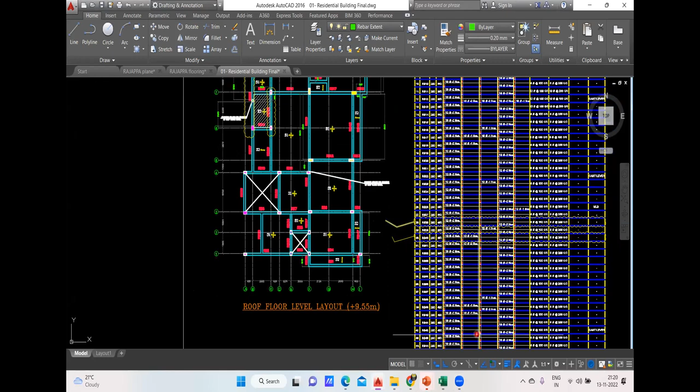In this lecture, I'll teach you how the shuttering quantity has to be found out. In the previous lecture, I started with the beam concreting, then did the slab and all, but I had missed the beam shuttering, so I'll explain that now. It's simple because I've already explained the plinth beam part and the first floor level, so you shouldn't find much difficulty. But anyhow, I'll explain how it has to be done. Let me go to the Excel sheets now.

This is not required, go with the other one. Yeah, fine, done. I think we should start from here, the RB1 part. You know how it has to be done? No? So where is my RB1? Right now I'm doing the roof floor level layout. Fine, so it's written here, RB1. So you know how to find it, isn't it? What you are going to do is find this dimension.

It will be DIM, dimension, enter. You take this outer to outer measurement. How much is this outer to outer? It is 5855, so I've written 5.855. The breadth is 0.2 and the depth is 0.35. Where should I find RB1? It's already here, okay, it's here. RB1, all the quantities are 200 by 350, 200 by 350, and I've done it.

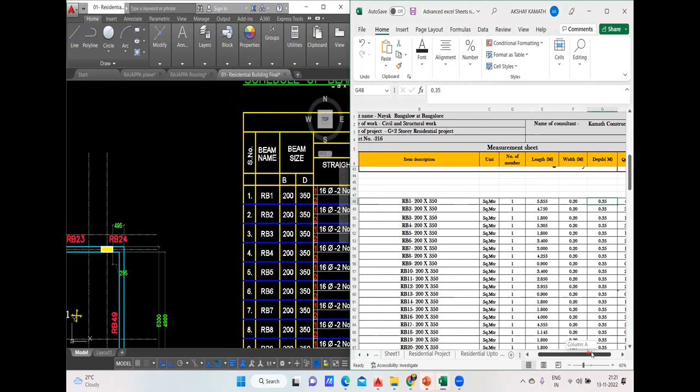Now can you find the shuttering quantity for me? It's very simple, always remember you have to find the bottom first. Once the bottom is done, you find the outside shuttering, and this becomes my inside shuttering. So I should know this particular length, which is 5455. I already took out the quantities here. I've done 5.855 multiplied by 0.2, this is the first one. Plus, open the bracket, this into this, plus 5.855 multiplied by 0.35, which will give me the outside shuttering because I don't have a slab in this part.

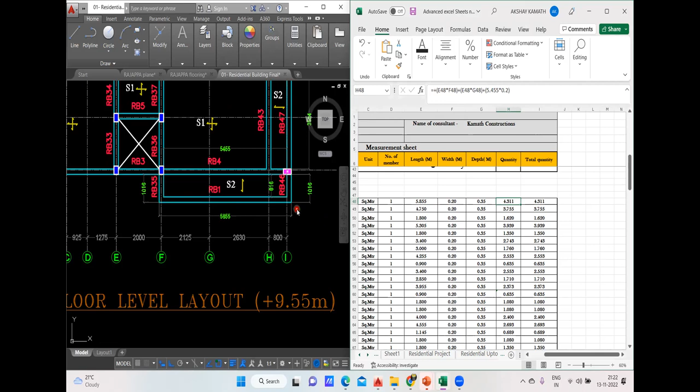Now if I come to this part, the length already taken is 5.455, and I have a slab here, so this becomes my inside shuttering. So what I've done is plus 5.455 multiplied by 0.2. Why is it 0.2? Because the overall depth is 350 and the slab thickness is 150. So 350 minus 200 comes out to be... yeah, 350 mm minus 150 mm comes out to be 200 mm, so 200 mm comes out to be 0.2. So this is how you're supposed to do it. Got it? So one I have done.

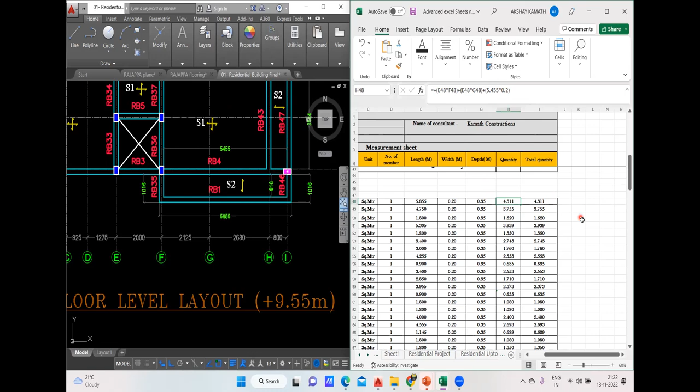So in the same way, you're supposed to do it for all the beams. I hope by this time you have knowledge of how it has to be done. Once you reach here, rest all things are very simple.

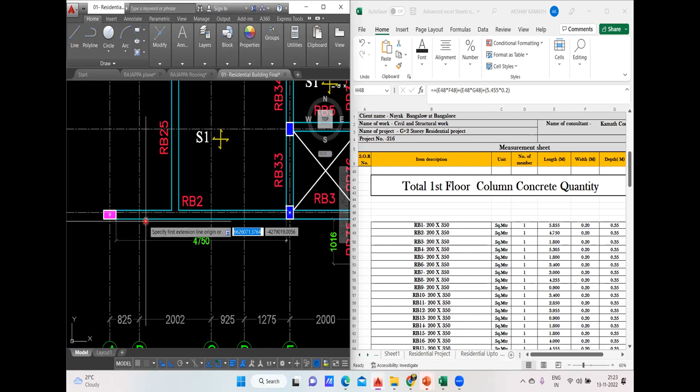For RB2, can you tell me what the answer will be? If this is RB2, it is 4750. I have written 4750, so first you find the bottom, that is 4750 multiplied by the breadth, you'll get the bottom beam shuttering. After that, 4750 multiplied by overall depth, because this becomes my outside shuttering. Then when you come to the inside part, you have a slab only in this direction. Only from this to this part you have a slab, which is 3000 mm or 3 meters, whereas here you don't have a slab, it's an open portion, so you take this length separately.

So what you can do is take 1550 into outside shuttering, this becomes my overall depth. So for RB2, again you multiply this by 0.35, and when you come to the inner part, you take 3000 into overall depth, that is 350 minus the slab thickness. If you do this, you'll get the total shuttering quantity.

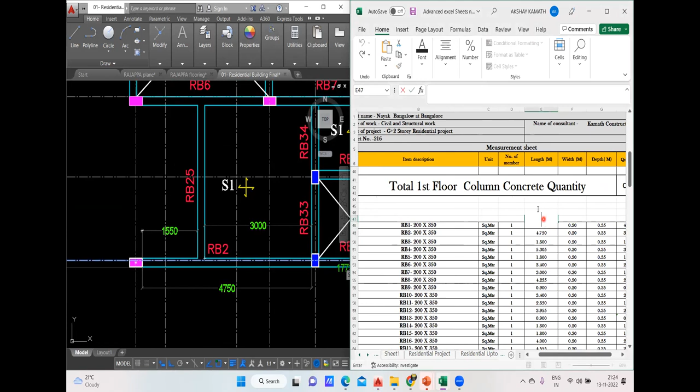If you still haven't understood, I'll do that, I'll do it somewhere here. Okay, this should work out for me. I'll do it here. First, what you'll do, open the bracket. So first it is 4.750 multiplied by the breadth of your beam. Plus, again open the bracket, you take 4750, multiply this by the overall depth, which will give my outside shuttering, so overall depth is 0.35. Close the bracket, plus again open the bracket.

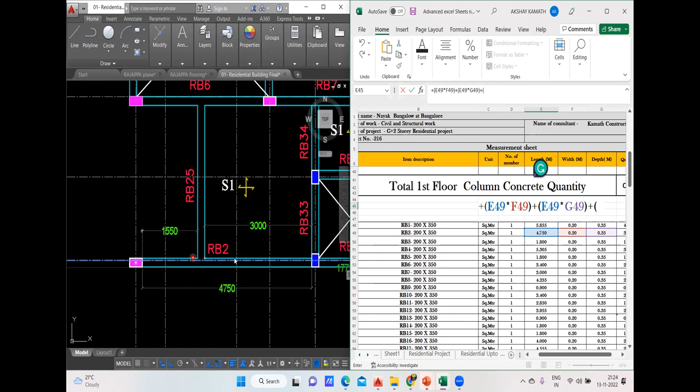This time you take this length as one; otherwise you can take the overall length and deduct this part, but one has inside shuttering and one has outside shuttering, so it will not work out. So you take individually. This is 1550, so write 1.550 multiply by 0.35. Why? Because this becomes my outside shuttering, I don't have a slab in this portion.

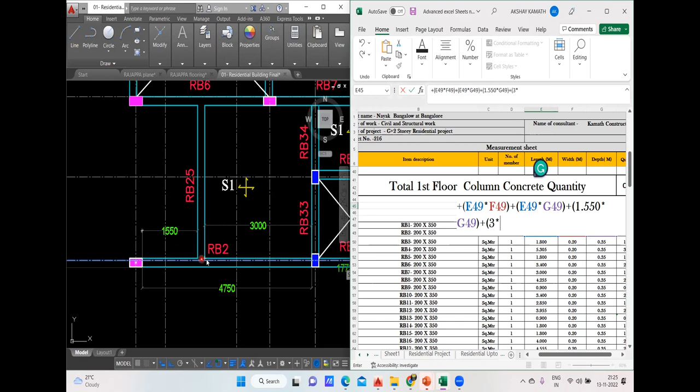Close the bracket, plus open the bracket. This length you already know, it is 3000 mm, which is 3 meter, so I'll write directly 3 there. Multiply by what? The overall depth is how much? 350, but you have a slab coming here, so 350 minus 150 comes out to be 0.2.

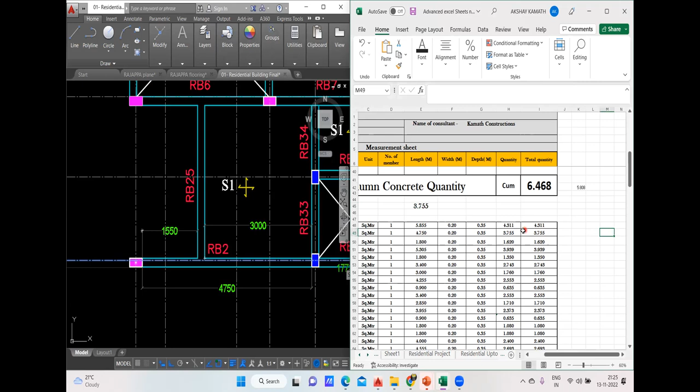Hit the enter button, how much am I getting? Let me verify the answer. Of course I'm getting the right answer. Let me decrease the size of that. You see, 3.755. I got the answer in front of you and already I've done and kept it. It's coming 3.755. Getting my point? So in this way, I hope if you have understood this, rest all things you can do on your own.

So I won't be there to help you out. Try to do it on your own.

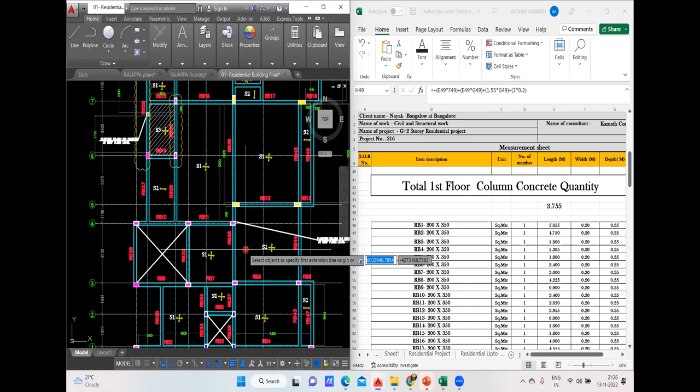Okay, done, fine. So I hope you can do all these things on your own, so there won't be any problem. But here there are a few beams where you find it to be a bit difficult, so in that case I'll be doing all those things.

Okay, so I have written one thing, that is RB28. So where is my RB28? It is somewhere here. Now you tell me how we are going to find the shuttering quantity for this beam. This entire beam is your RB28, and they have written there's a column coming here.

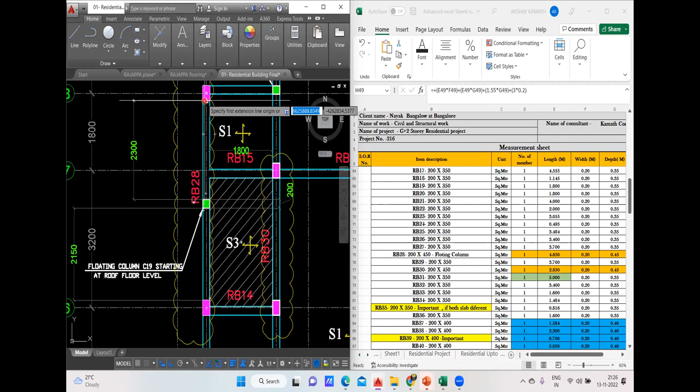So first what you'll do is measure the length from this outer to this outer. How much is it? 4650. So we have written 4650. And the size of your beam RB28 is 200 by 450. So written 0.2, and also the depth part we have done 0.45.

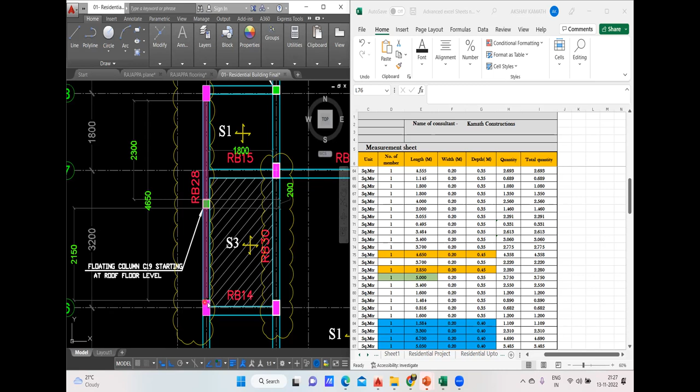Done. So first you will find the bottom, isn't it? For this, first you are going to find the bottom. So first how will you find the bottom? Very simple: whatever length you have, multiply it by the breadth. That means I'll do it here: 4650. I'll do it in front of you here.

So where is that? Yeah, this part, this one. Okay, plus, open the bracket: 4.650, I'll multiply this by breadth, that is 0.2. Plus, next this complete thing becomes my outside shuttering, isn't it? So whatever length I have, if I multiply this by overall depth, I'll get the outside shuttering.

So again I'll open the bracket. I'll take the same length and multiply this by the depth, that is 0.45, and close the bracket. Good, plus, again I'll open the bracket.

Now you see this particular beam has one cut here, you have a secondary beam passing. So you can take dimension from here to here as one dimension, and dimension from here to here as another dimension, up to this part, isn't it? Your beam shuttering will go up to this part, so you just measure these parts. One is from here to here, which is 1600. The other one is from there to here, which is 28...

We'll measure it again. Yeah, from there to... 2850, I guess. Yeah, okay, that's it. So again, you have a slab in this portion, you have a slab in this portion.

So that means both become your inside shuttering, right? You have a slab, so this becomes my inside shuttering. You have a sunken slab, and we know that in the sunken slab also we are supposed to deduct the slab thickness, but the only difference is that only the bottom slab thickness will be deducted. Anyhow, you have to deduct.

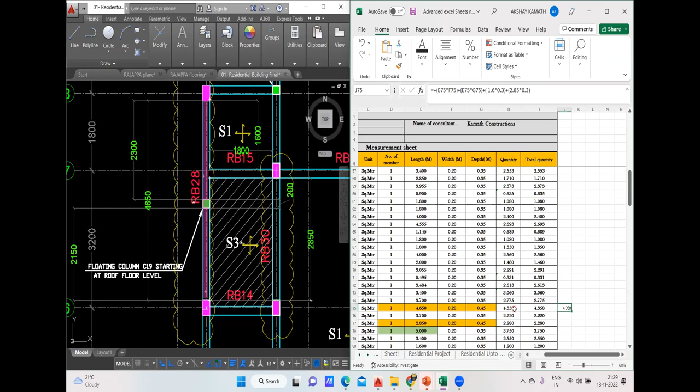Got it? So here there is a small thing which you need to understand, which I'm going to explain now. The small question you need to ask is, sir, you took the overall length. This answer I matched, okay? Say 4.358 I got here, and here also it is 4.358. So the answer is matching. You may have one doubt.

Sir, when you took the overall length, we have a column coming here. So why didn't you deduct the length of this column? Very simple question, right? Because previously, whenever we were taking the beam bottom, for example take this particular area, how we used to do it: we used to take the outer of this column to the outer of this column. This was one length, and then from this outer to this outer. So this is how we were supposed to take it, isn't it?

But here, sir, you took completely RB28. We don't have an issue with that. But you can see, sir, here there is a beam - I'm sorry, there is a column coming. So whatever is the width of the column, that should be deducted, because we are not going to put the bottom. You have a column here, the bottom won't come, right?

Yeah, whatever you're thinking is correct. But the main thing which you need to understand is this RB28 - this particular column, what you can see, it is your floating column. So what do you mean by floating column?

So this column is not coming from the bottom. If this column was coming from the bottom, then my beam bottom would have stopped here, and it would have started from here. Then whatever was the width of this, I should have deducted. This width I should have deducted.

Exactly, you are correct. But since it's a floating column, this is my beam - over the beam your column is coming. So if over the beam my column is coming, do I need to deduct anything from here? No, this complete length I'm supposed to take care of. Right? You're getting my point. This column, when it comes, it's only the reinforcement we are going to insert into this beam.

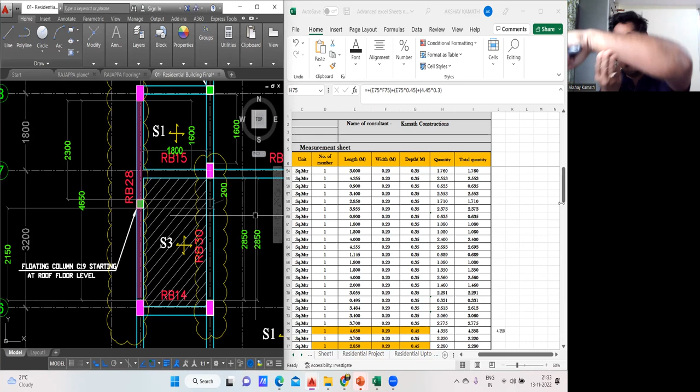I told you about the floating column - only the reinforcement is going to get inserted. So the bottom will always be, this bottom will be a beam bottom only. You don't require a bottom for your column. Only the column - once your beam is casted, we put additional shuttering to the column, and we are going to cast the column on a later date. Getting my point? Okay, so that is why I'm taking the complete length of my beam bottom.

So there is no point in deducting this particular column length. But whereas in this case, you need to deduct. Why? This is not your floating column. This is the column which is coming from the foundation level. So in that case, you cannot take the complete length as your bottom.

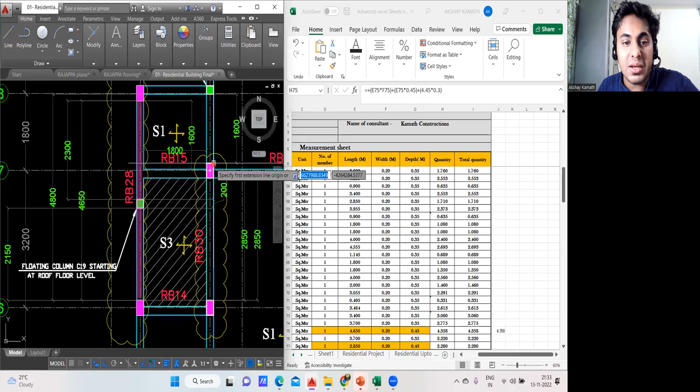If even though you take a complete length - see, from here to here, if this is my beam bottom, 4800 minus this I need to do. This width I need to deduct. Only then I'm going to get my beam bottom, because this column is coming from the foundation level. So in that case, my bottom will be till this level. The next bottom will start from here. This I'm going to reduce, deduct.

Getting my point? Same is the case in this portion also, same is the case here. So take this as another case. Okay, this answer you understood. Now come to RB39. So I've written RB39. See, RB39. Now, your RB39, you tell me how you are going to calculate the beam bottom.

Is it that you're going to take a complete length from the outer of this column to the outer of this column? You can take, but is this the actual length where your bottom will be coming up? No. Why? You need to deduct this particular column now. Why didn't you do it in the previous one? The reason is this is not my floating column. This column is coming from my foundation level. So in that case, I need to deduct.

So it's not written anything about floating column.

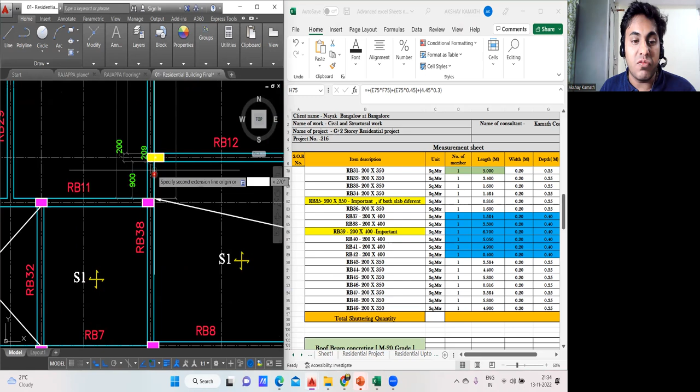So it's a floating column. Whereas here, this is floating column. If this is my floating column, I don't have to deduct this. So I can take this complete length from here to here if I want to put a beam bottom. But anyhow, it doesn't come, because RB38 will stop only from here, and this portion is coming in this portion. Getting my point? So for RB38, you tell me RB39 how we are going to do.

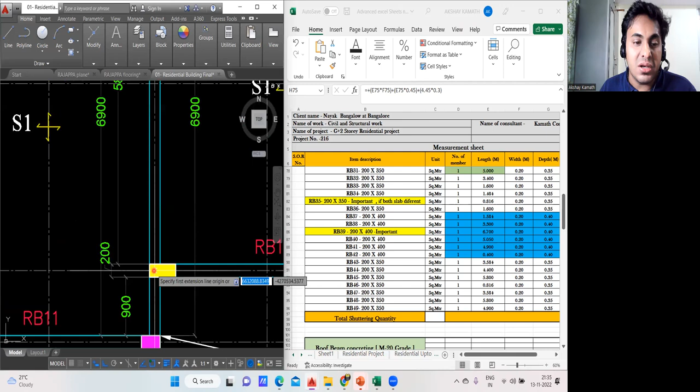6,900 minus 0.2. How much it is? 6,900. So this is 6,900. 6,900 minus 200 is 6,700. So that is why you can see I've written by default 6,700 here.

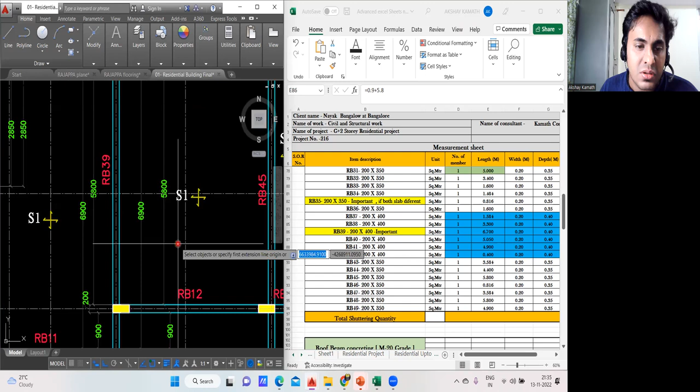But anyhow, I have done a split to that. I've taken this separately. This distance I've taken separately, which is 5,000... 5,800. And I've taken this separately, 900. 5,800 plus 900 comes out to be how much? Agree with me? It comes out to be 6,700. So you can see I've written 6,700.

Getting my point? So this you need to be a bit careful. Other than that, everything is very simple. After that, what you're supposed to do: if you got your beam bottom as 6.7, then 6.7 into width, you'll get the beam bottom.

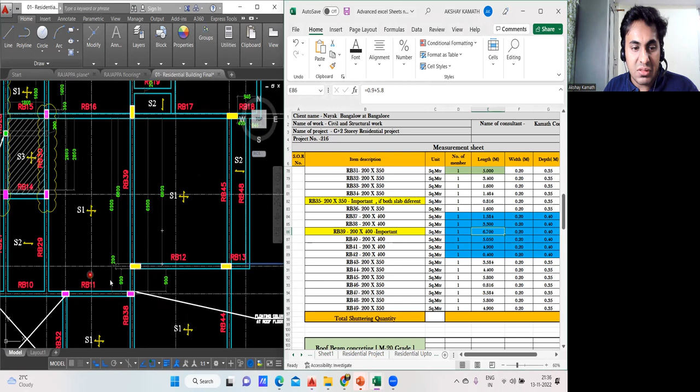Okay, then for shuttering, now again for this beam, I have a slab in this portion. Similarly, for this small portion, I have a slab here. That means for this particular beam, both the sides become my inside shuttering. So quickly, let me do that somewhere here.

So tell me, open the bracket. Exactly 6.7, you multiply this by the breadth. So breadth is 0.2. Done. Close the bracket. Again, plus open the bracket.

This time you take the complete length. What is the complete length? It is 6.7, agree with me? This complete length where my shuttering will happen is 6.7 only. So 6.7 multiply by what you are going to do - what is the overall depth? Overall depth is 400. Out of that, everywhere it is a slab of 150. So 400 minus 150 is 250.

So 0.25. I'll multiply this by 2 times. Why? One is on this side shuttering I should get, another on this side shuttering I should get. Anyhow, the length I have taken completely, so it will take care of both sides. I'll multiply it by 2.

I'll close the bracket. I'll match the answer. I'm getting 4.69 here. Let me match it with this. Exactly, see, 4.690 and this is 4.69. We can make it as 0 also. Take 6 point. Got it. See, 4.690 and this is matching here, matching to this. Matching, 4.690, got it.

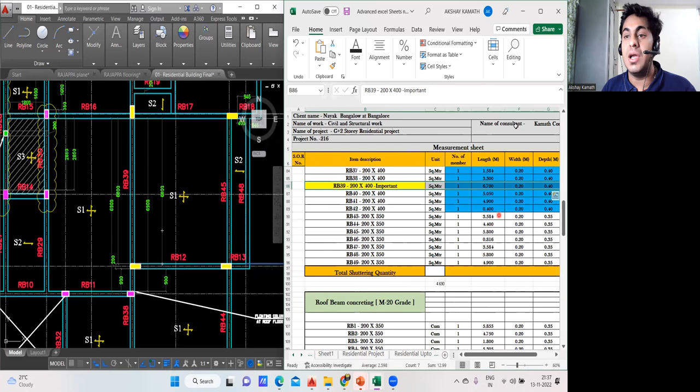That's the only catch in this particular floor. Rest all things, you are in such a position now where you can take out the quantities. Anyhow, I'll show you what should be the final quantity. The final quantity, once you do all these things, should come out to be 110.527 square meter.

So when you take out the slab, I mean the beam bottom and the beam outside, inside shuttering, everything put together for your roof floor, it should come out to be 110.527 square meter. Got it? Great. So up to here, try to do it. Anyhow, the slab part, I have covered it in the previous lecture, so the beam part was pending. I've explained you here. Rest things, this should be in square meter.

See, why I have done the coloring, why I have done such thing - what is the reason? The reason is for you people to understand. So that is why I've done it. Whenever you try to do estimation, wherever you find that you're going to do some wrong calculations, try to highlight. For example, my RB22, my RB20, it is a floating column, so I know that since it's a floating column, I may deduct that width of the column, which you are not supposed to do. In that case, just highlight it, put it in a different color so that at the time of estimation, you'll not go wrong here. So that is why I've given a different color to that, so that we'll never go wrong anywhere.